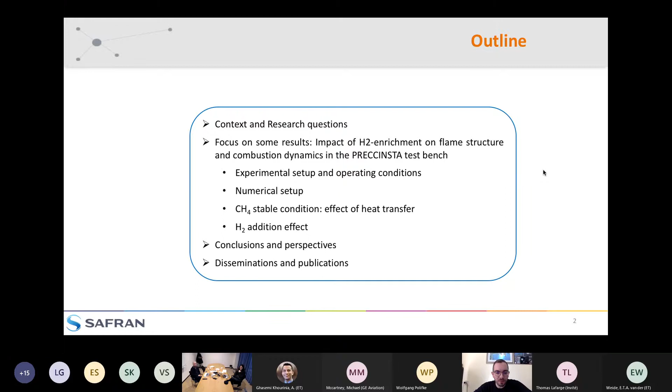First, I will present the context and the research questions. Then I will focus on some results, in particular on the impact of H2 enrichment on flame structure and combustion dynamics in the PRECCINSTA test bench. I will focus on the effect of heat transfer and H2 addition, and finally present the conclusions, future works, and dissemination.

As you all know, in the framework of the project, there was, at least before COVID-19, the growth of air transportation. This was leading to the problem of impact on ecosystems, with the need of implementing clean combustion technology and increasing engine reliability.

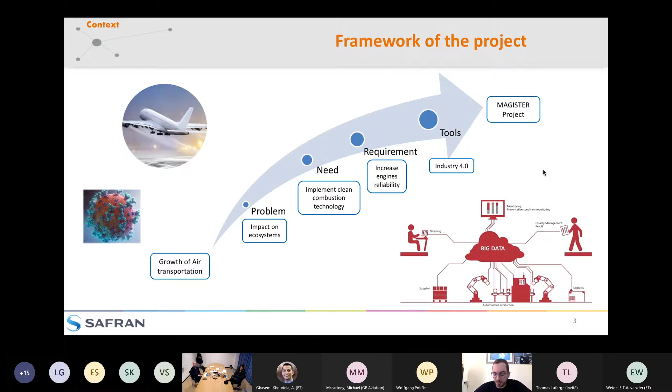If we have a closer look at the projection of CO2 emissions from the aviation sector, by 2050 CO2 emissions will be 3 times higher compared to the current level. Even taking into account efficiency improvements due to research and development, this is still not enough, especially considering the net zero target of the European Union.

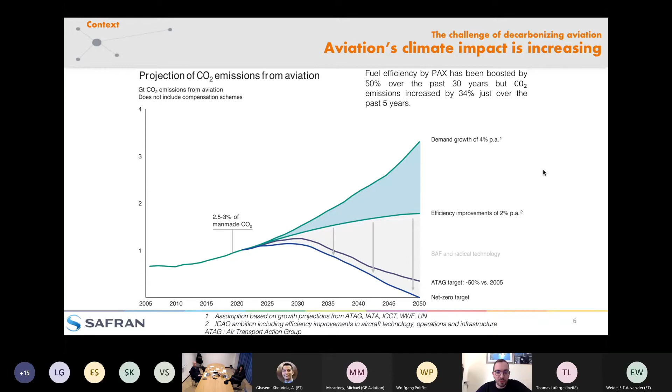So we need to do something, and in recent years a lot of lean combustors have been developed to do so. But as we all know, these lean combustors have some flame dynamics issues, for example thermoacoustic instabilities, lean blow-off, or ignition capabilities that are not the best.

So we have different solutions. For example, we can change geometry, and this has been done by Safran Helicopter Engines with the spinning combustion technology. This new technology, recently patented, has increased lean blow-off and ignition capabilities.

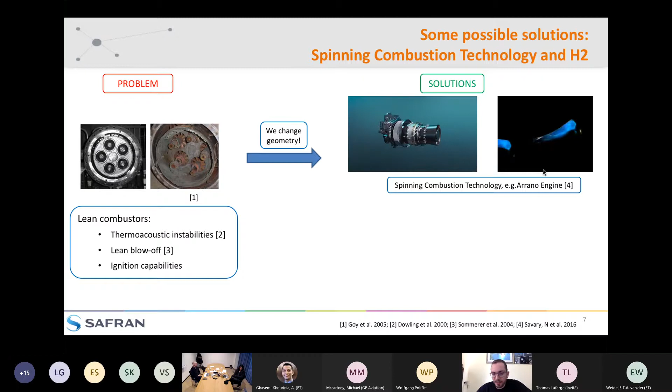Another option is to change fuel, for example adding H2 hydrogen to our combustor in order to change the thermoacoustic behavior, to stabilize cases which are not stable. This has been proposed recently by Safran or Airbus.

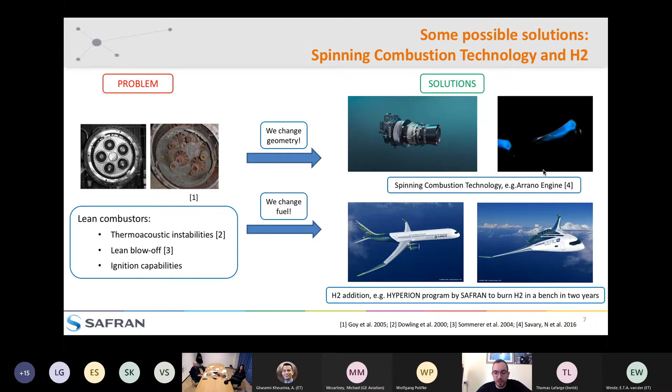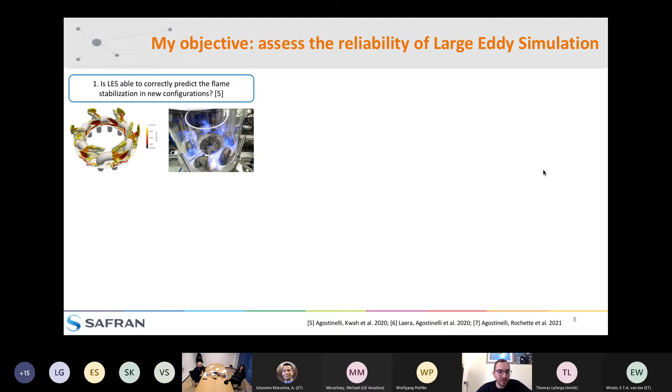My objective in this context is to assess the reliability of large eddy simulations, and in particular to answer the following questions: for example, is LES able to correctly predict flame stabilization in this new spinning combustor configuration? Or again, is the numerical modeling appropriate for hydrogen flames?

For example, we saw that we need complex transport properties to take into consideration bi-fuel flames with hydrogen. Or again, what is the solution dependency from the mesh? Can we build a static mesh adaptation approach for reliable LES in reacting flows?

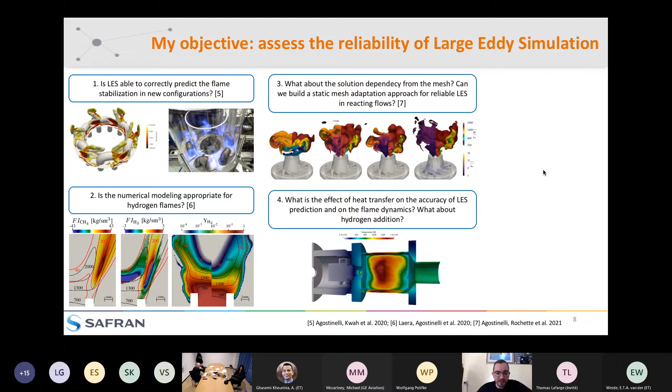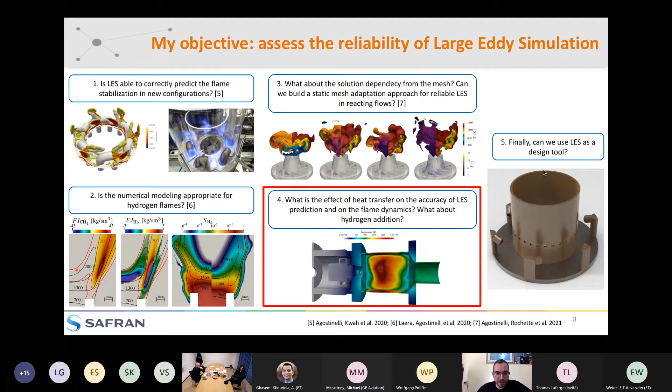Also, for example, the heat transfer effect on LES and hydrogen addition. And finally, can we use LES as a design tool? In this presentation, I will focus on the heat transfer effect and hydrogen addition, which is the ongoing work at the moment.

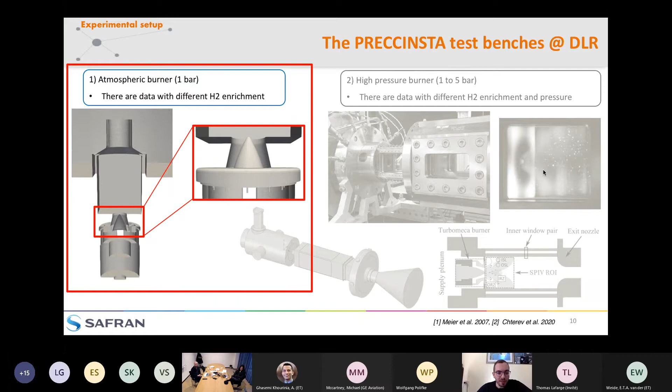To do that, we will focus on the PRECCINSTA test bench, a well-known test bench operated by the German Aerospace Center. There are 2 burners, the atmospheric burner and the high-pressure burner, both operated with different H2 enrichment to analyze the effect of H2 enrichment on flame dynamics.

For the sake of being short, we'll focus on the atmospheric burner results. We selected 2 operating conditions. We started with condition A, a stable operating condition from the thermoacoustic point of view, with no hydrogen in this case, so only a methane flame, technically premixed. We compare to different operating conditions available in the literature, for example Franzelli or Meier et al., operating the test bench at higher power and lower equivalence ratio. The idea is to validate our modeling approach with this stable case.

Then we pass to condition C, in which we inject hydrogen, so we have 50% of hydrogen by volume with respect to CH4. And we analyze the effect of hydrogen enrichment on the flame structure and flame dynamics.

And we see if we are able, with LES, to analyze this and to reproduce this thermoacoustic behavior.

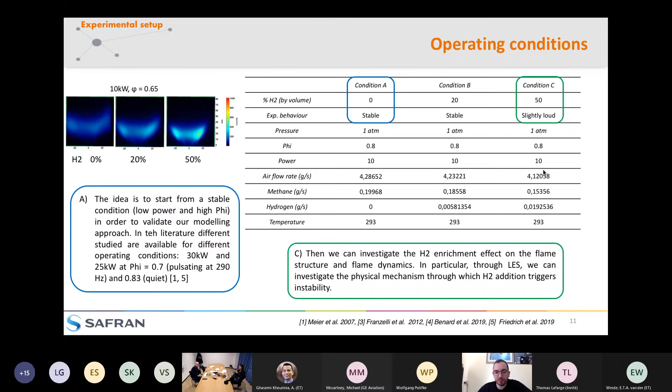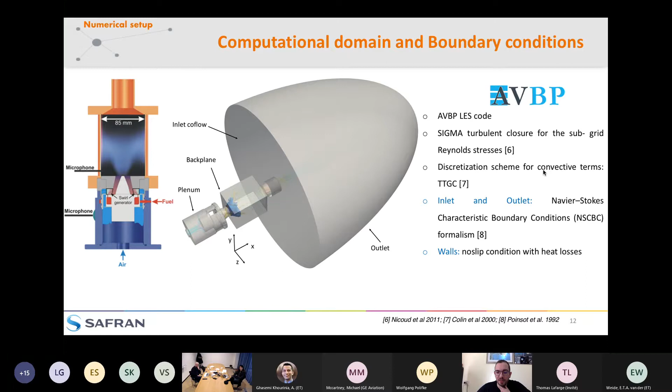This is a slide on the computational domain and boundary conditions. We use the AVBP LES code with the sigma turbulent closure, TTGC, so third order scheme. The inlet and outlet boundary conditions are treated with the classical NSCBC formulas, and the walls are treated as no-slip with heat losses.

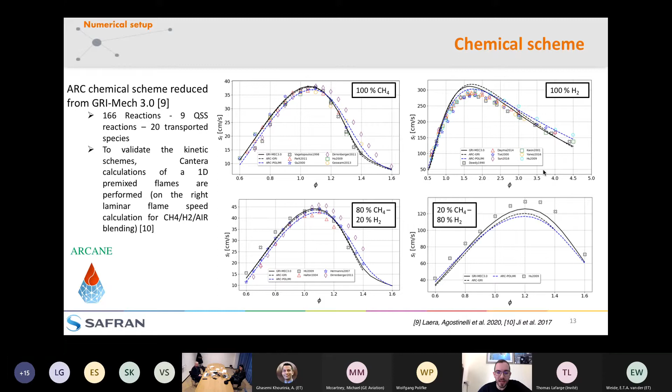This is the chemical scheme that we use. We derived an ARC chemical scheme and validated it in a PCI last year. We derived this scheme from the GRI-Mech 3.0 mechanism. It comprises 20 transported species, and we validated it through some Cantera calculations of 1D premixed and diffusion flames. You see here an example of the laminar flame speed calculation for different blendings of CH4 and H2 with air.

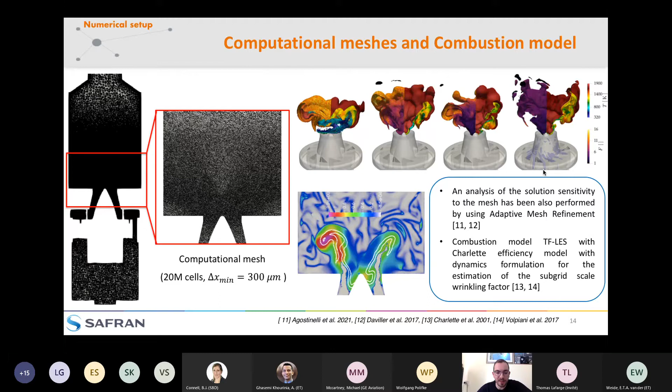This has been accepted for publication on Physics of Fluids. We applied an adaptive mesh refinement method. For the combustion model, we used a TF-LES model with the Charlette efficiency model with dynamic formulation, because sometimes we need the dynamic formulation of the beta parameter, as underlined, for example, by Volpiani et al. in 2017. This is especially true in the unstable case.

So we pass now to condition A, which is the stable condition. We analyzed, in particular, in this case, the effect of thermal boundary conditions, which are very important in this test bench. So the problem is now how to set this thermal boundary condition.

The fact is that there are not many experimental data about thermal boundary conditions. There are just some measurements of the fluid temperature made by Meier in 2007. And based on this study, for example, Benard et al. in 2018 just set the temperature of the chamber walls by tuning this temperature.

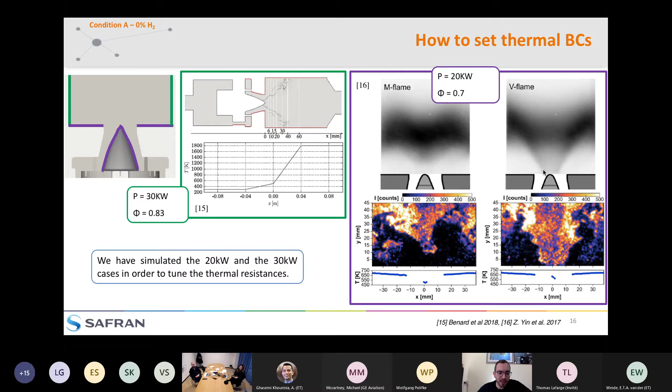For example, there are also other experimental data about the backplane and the bluff body, but in different operating conditions, as measured by Yin et al. in 2017. So what we have done, we have simulated these other two cases, and we have tuned our thermal resistances.

However, if we do that, this approach takes into account the heat losses, but does not take into account the preheating of the gases. And also, we have a thermoacoustic instability of the flame, which is not experimentally observed.

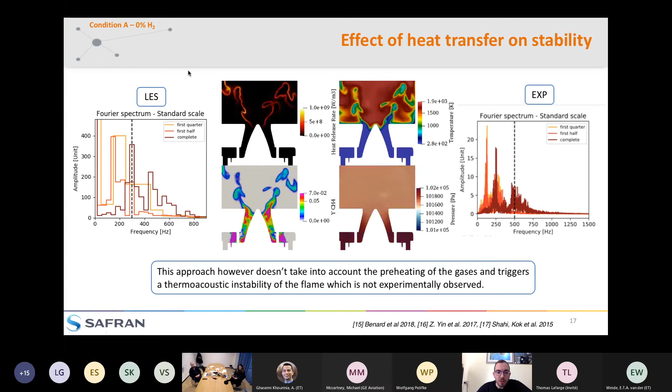So to solve this issue, we pass to LES heat transfer coupled simulation. Basically, we meshed also the solid part. Here, for example, we have a mesh of the solid part with 15 million cells, and we have at least 5 points in the thin regions, so in the chamber walls. You see here in the slide, in red, you have the solid part, and in blue, you have the fluid part.

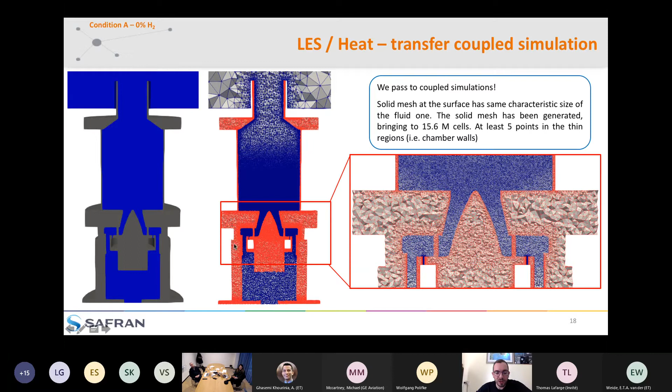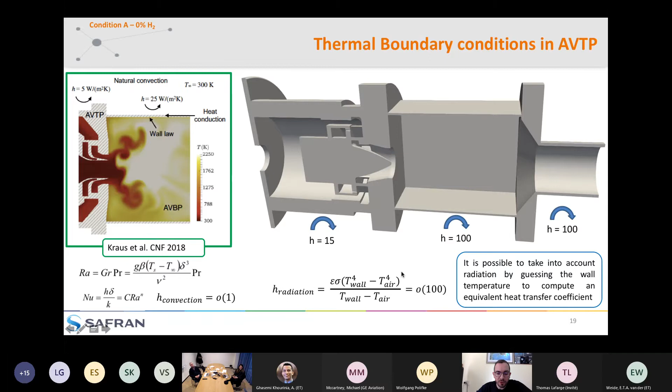Of course, we had to set also some thermal boundary conditions in this AVTP software, in this code which solves for the conduction in the solid. Basically, there are different correlations to estimate the heat transfer coefficient on the external walls of the solid part. So in particular, if we guess the temperature of the walls, we can also estimate an equivalent heat transfer coefficient, which takes into account somehow also the radiation losses.

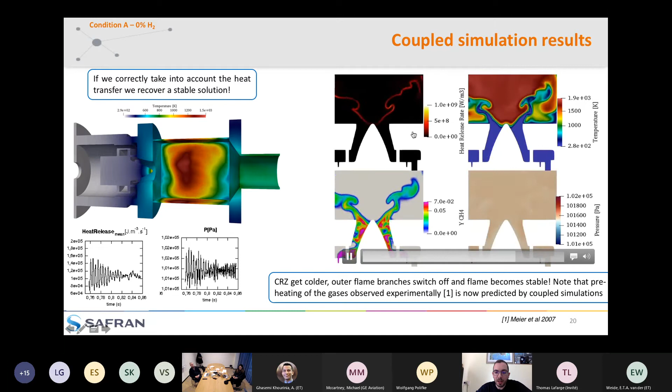If we pass to coupled simulation results, what happens is that we are able to recover, again, stable conditions. For example, the central recirculation zone gets colder. We note a preheating of the gases as observed experimentally in 2007, and now we have a stable condition. So if we start from the condition that we had before, in an unstable condition, and we go a bit later, we see that now the flame does not oscillate anymore, and the case is stable again.

We pass now to the effect of hydrogen enrichment. So now with the coupled simulation, we are able to recover the stability, the thermoacoustic behavior of the stable case. Let's see what we can do with the unstable case, with the hydrogen addition.

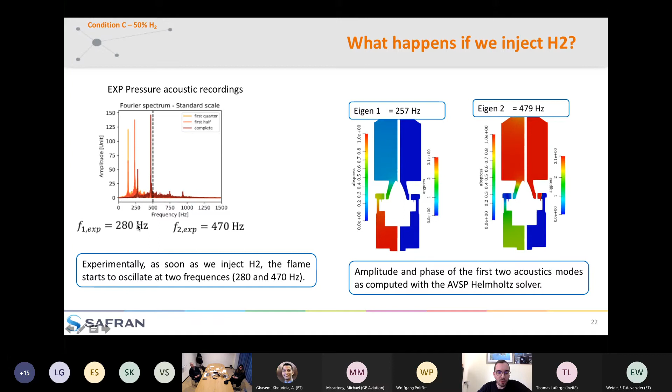Experimentally, it happens that as soon as we inject H2, the flame starts to oscillate at two frequencies, at 280 Hz and 470 Hz. In particular, if we compute the acoustic modes with our AVSP Helmholtz solver, we have these two modes. The first at 260 Hz is a Helmholtz mode, where the plenum and the chamber oscillate in phase. The second is a mode at 480 Hz, a chamber mode in this case.

So we recover the two thermoacoustic oscillations that we notice experimentally. The question now is: is LES alone able to capture these dynamics? The answer is not really, because as soon as we inject hydrogen, as you see in this transition animation, the flame gets shorter and starts to oscillate as it happens in the experiments. So we are able to see that the case becomes unstable.

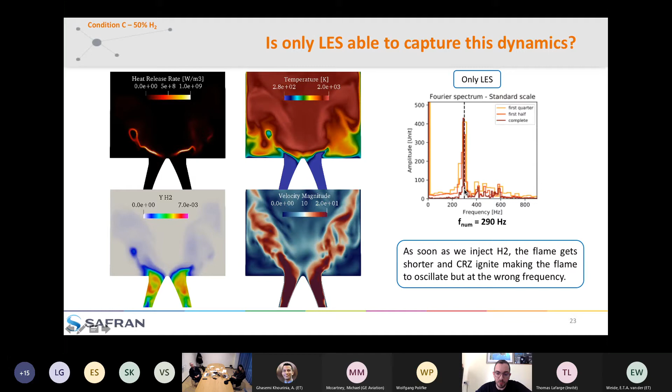However, if we look at the FFT of the LES signal, we see that the flame oscillates at a frequency which is not the right one. So we oscillate at 290 Hz, which is much closer to the first mode, the Helmholtz mode. But the flame does not respond to the chamber mode.

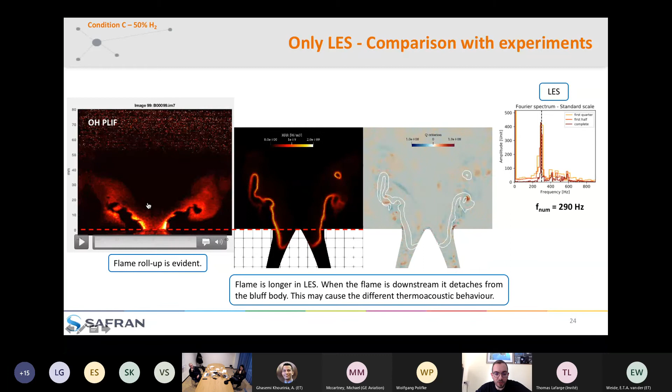However, as you can see, the flame is longer in LES. Also, when the flame is downstream, it detaches from the bluff body. This is something that we do not notice in the experiments. So the bad news is that with only LES, we are not able to couple with the combustion chamber mode at 470 Hz.

With coupled simulation, so with LES heat transfer coupled simulation, we are able to capture the flame dynamics, and now we are able to couple with the combustion chamber mode at 500 Hz. However, you see there is a small peak around 280 Hz, but it's not really comparable with the one seen in the experiments.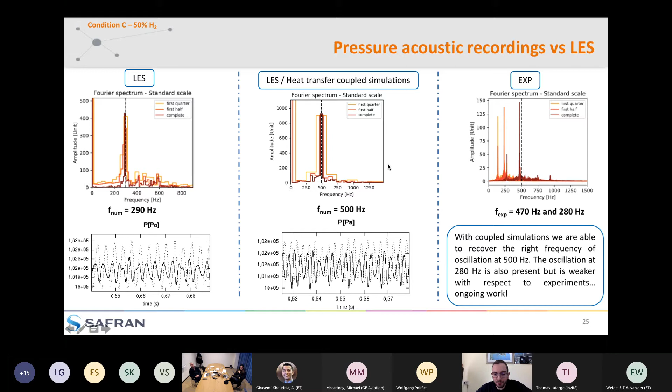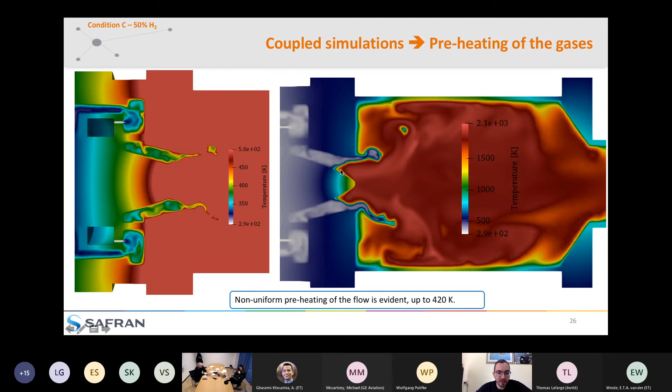This is due to the preheating of the gases, which we are now able to capture with the coupled simulation. So you see that there is a strong preheating here. You also see the temperature of the solid part of the coupled simulations.

To conclude, we analyzed the effect of heat transfer and H2 enrichment in the PRECCINSTA burner, in particular in condition A, which is a stable condition. We trigger an instability if heat transfer is not correctly taken into account, in particular when the corner recirculation zone is warm. In condition C, the flame gets shorter with ignited branches in the corner recirculation zone, and the case becomes unstable, as in the experiments.

But in LES, in order to capture correctly the dynamics of the flame, we need to use LES heat transfer coupled simulation and also a dynamic formulation of the efficiency model.

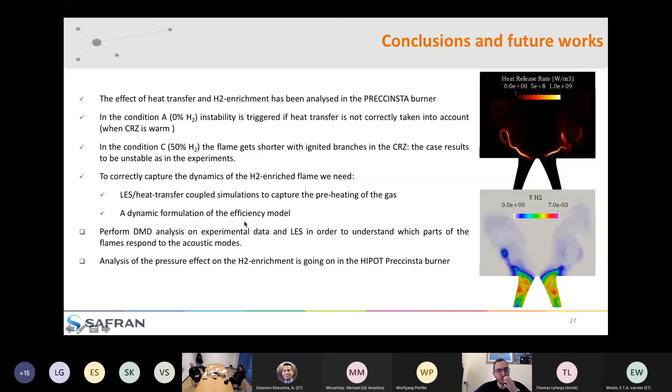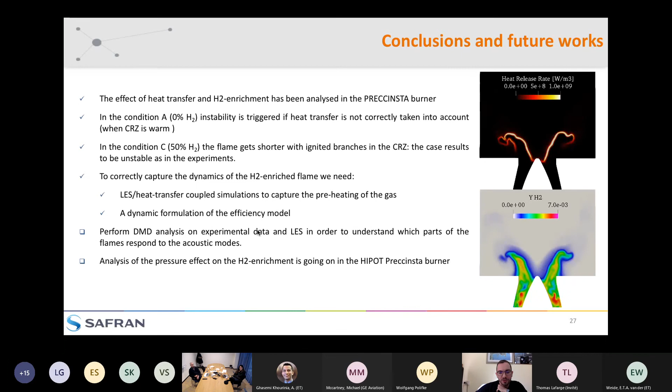As future work, we plan to perform DMD analysis on the experimental data and LES in order to understand which parts of the flame respond to the acoustic modes. Also, we are performing an analysis on the pressure effect of H2 enrichment in the high pressure PRECCINSTA burner.